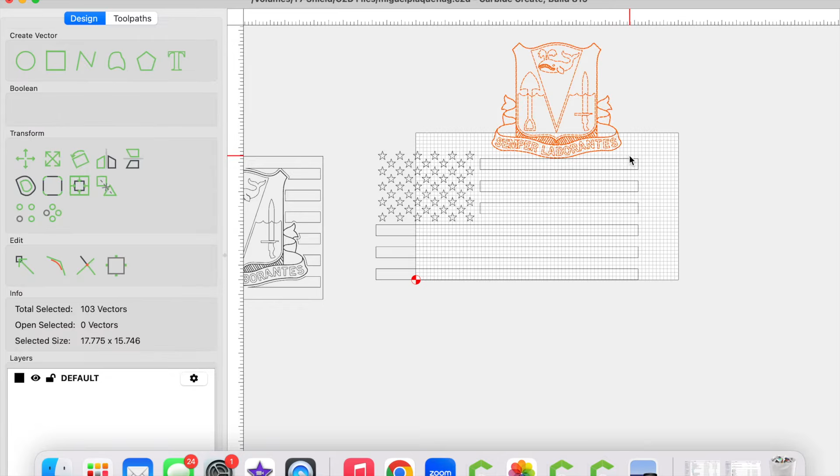For this particular flag, we need to add this logo, and we also need to add a space for a plaque, which is this little rectangle here.

But let's go ahead and talk about our setup screen. The first thing that I need to do is create the grid, which is basically the material that I'm cutting on. It's a 36-inch wide piece of pine, and it is 20 inches tall. That is the material that I'm carving on, and that is from Lowe's.

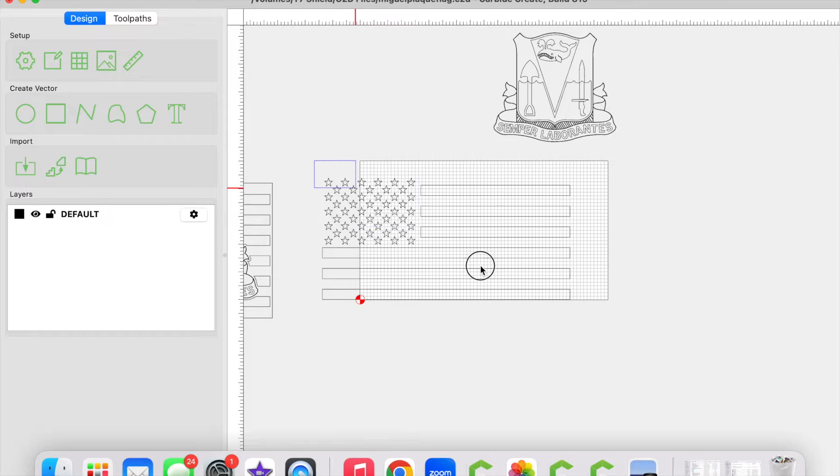That's the edge glued pine panels from Lowe's. My final flag is not going to be that size though. It is going to be 19.5 inches tall. So what I'm going to do is move this flag, and create a rectangular vector. I'm going to make this 36 inches wide, which is the true size of the panel, but 19.5 inches tall.

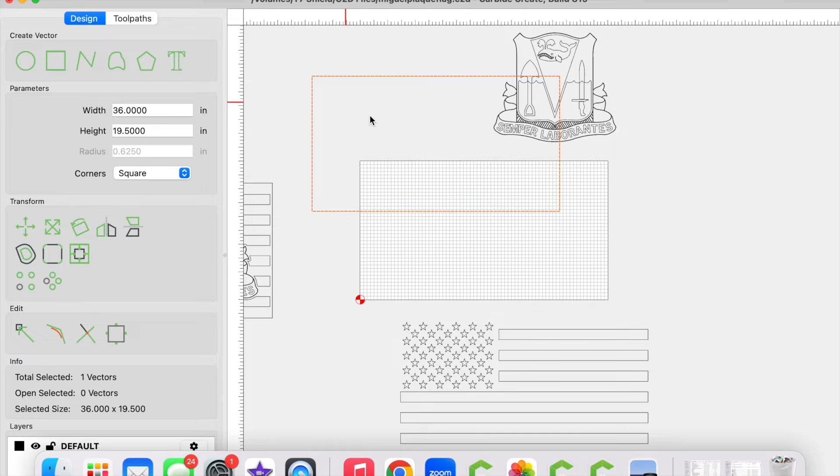And I'm going to have that vector selected. I'm going to come over here to the align vectors option, and I'm going to center it. This is going to give me the correct dimensions of the flag, so everything's going to be sized to the correct dimensions.

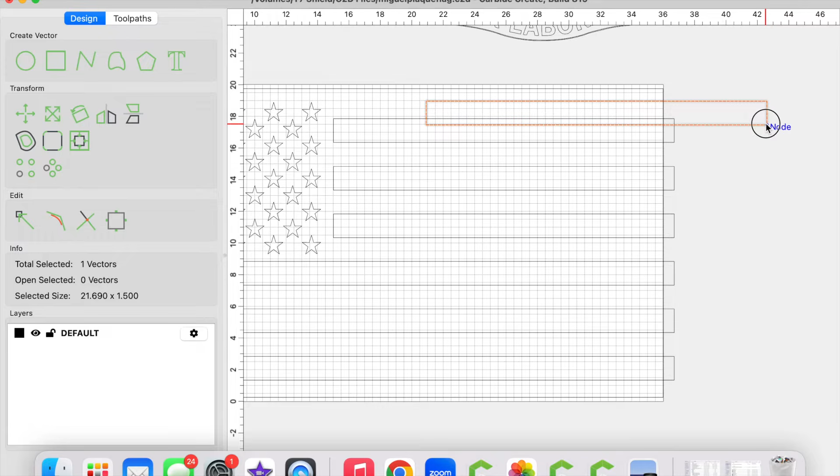So what I need to do now to correctly size this flag is create and copy, actually more than anything, not create, but copy and paste this particular stripe first. So I'm going to press Command C and Command V. If you have a Windows operating system, it's Control C and Control V. And I'm going to attach it to this corner node just to get the stripe attached there.

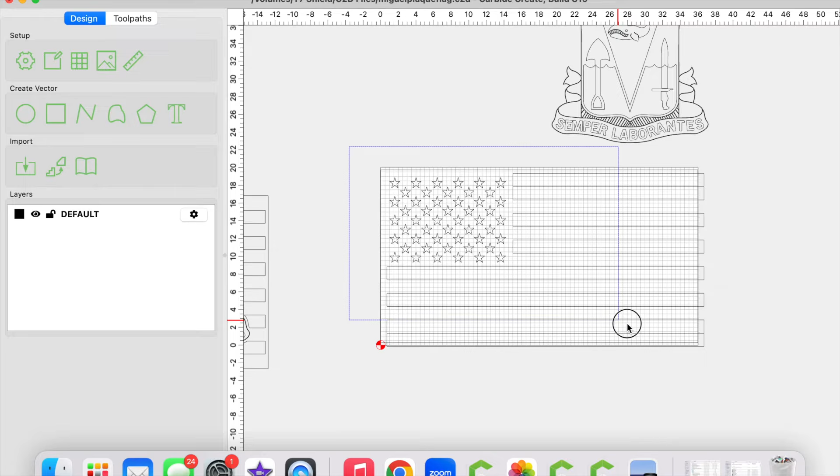And I'm going to do the exact same thing to this bottom 12th stripe, and then paste it here to create my 13th stripe. Once I have those there, I'm going to select the flag. As you can see, I selected the outer vector, so I need to get rid of that by holding Shift and deselecting it.

Now I can group my flag by clicking on this group vectors icon, and then I'm going to press align vectors and align center horizontally and vertically. As you can see, that is a little bit too close for my liking here on this edge for the stars and the stripes as well.

So I'm going to click OK, but I'm going to click on scale, and then click and drag the flag a little bit in to resize it or shrink it. And then once it's reduced in size, I'll do the exact same thing, align vector, center horizontally and vertically. And that to me gives me what I like.

It's a little bit more space here with the stars, and this top stripe is a little bit closer to this edge, so I'm okay with this particular position here. So we're going to click OK, and that is good to go. I'll go ahead and select everything and ungroup it. Now we can get rid of this stripe, number 1 and number 13.

Okay, with my logo now, resize it to whatever you think would look best within your flag. I'm going to center it now to the right hand side of the flag, or basically center it to this stripe, to the union stripes.

So the first thing that I'm going to do is, you can have it way out here, but you're going to have your logo selected, hold shift and select a stripe. Now you have both these selected. We're going to click on align vectors, and click on align centers horizontally. So now the logo is centered to the union stripes.

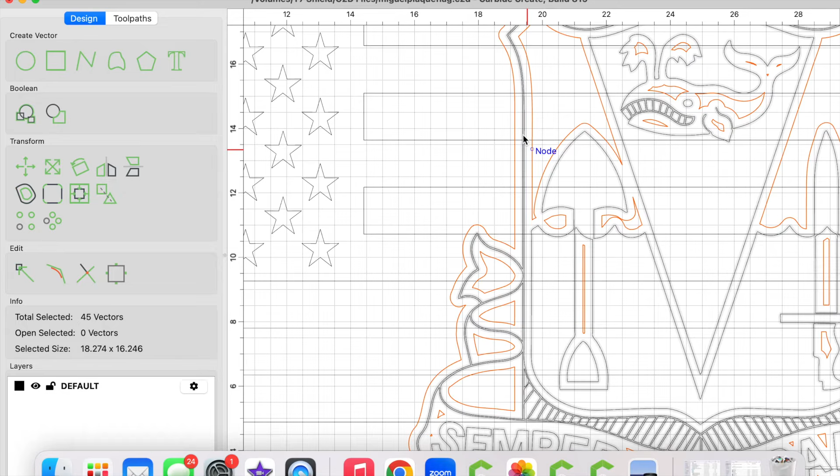If we zoom in here, you can see that the vector we want is this outside vector, the offset. But notice that also all these extra offset vectors were created. We don't want those. So the easiest way to get rid of these without selecting them individually is to hold shift, deselect the one we do want to keep, which is this outermost vector, and press delete.

Now every other offset that was created is deleted. The purpose of this process is to split these stripes so they go around and cut away, right, rather than going through our design as they currently are. With the offset created, we're going to see which stripes intersect that offset. It looks like every single stripe has some sort of intersection with this offset.

So we're going to hold shift and select every single stripe, and then group them. With the stripes grouped, we're going to hold shift and select that outermost vector, and press Boolean subtraction. Once we press Boolean subtraction, these blue vectors are what's going to be your final product.

You can see that the blue vector, or the stripe, comes up all the way to this part, and then doesn't intersect anymore with this logo. So let's go ahead and press OK. And there you go, we have a perfectly created logo, or merged logo with the flag.

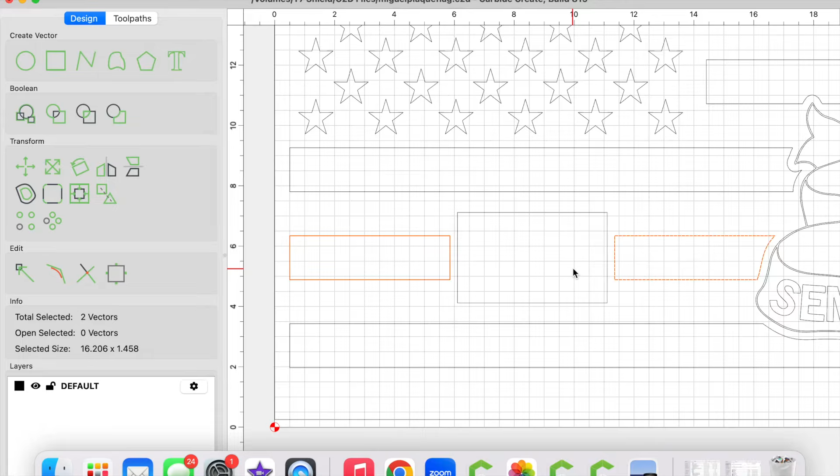I'm then going to click on Boolean subtraction, and that creates that split there. You can see it in the blue already. Press OK, and now we have that stripe split or subtracted to allow for that plaque.

I just want to jump in here now that I've edited this video — I think the best way to center the little plaque rectangle horizontally would have been to use the stars rather than the stripe itself. Had I used the stars, it would have given us a better centered look overall. So just keep that in mind. If you do something like that, I'd recommend centering horizontally based off the location of the stars.

Okay, so the next thing we need to do is work on our tiling. Since this is a flag that exceeds the cutting area of my CNC, I need to divide the carve into 2 steps, or 2 carves, in this particular case.

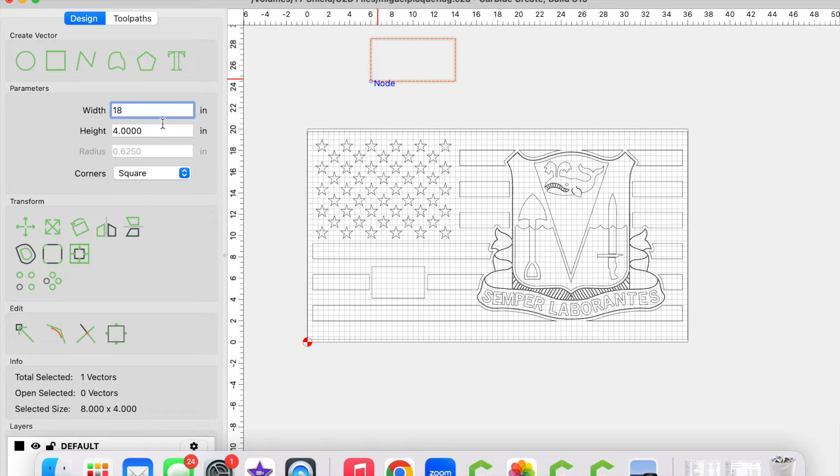Okay, so now we're going to go ahead and create those tiles. A tile is just going to be a rectangle vector, and I'm going to divide it in halves, because my cutting area is 30 by 30, so 30 inches wide. Since this is 36 inches wide, I cannot cut it straight in, so I'm going to create a width right down the middle, which is 18. This is going to remain the same at 19.5.

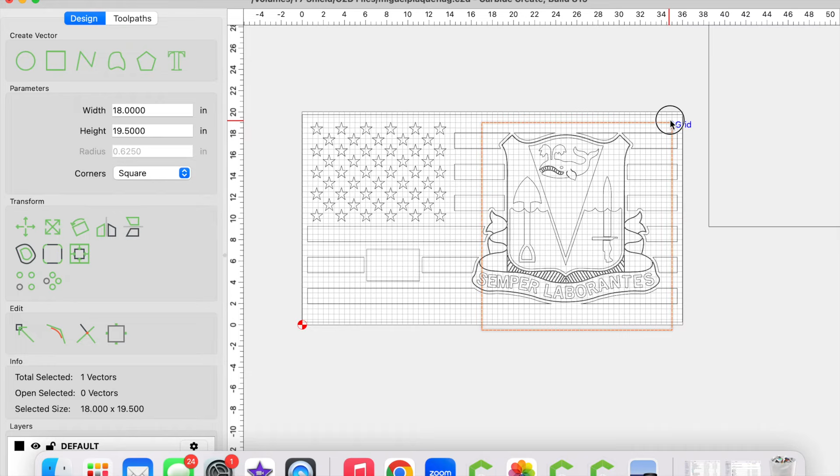I'm going to have that vector selected. I'm going to copy and paste it just like that, and I'm going to have this one here available for later. I always like to start on my right hand side because that's what gets carved first when I lay it on my CNC. So I'm going to put it on the right hand side, bring this vector and attach it to the very corner there, and we're going to move on to the next step.

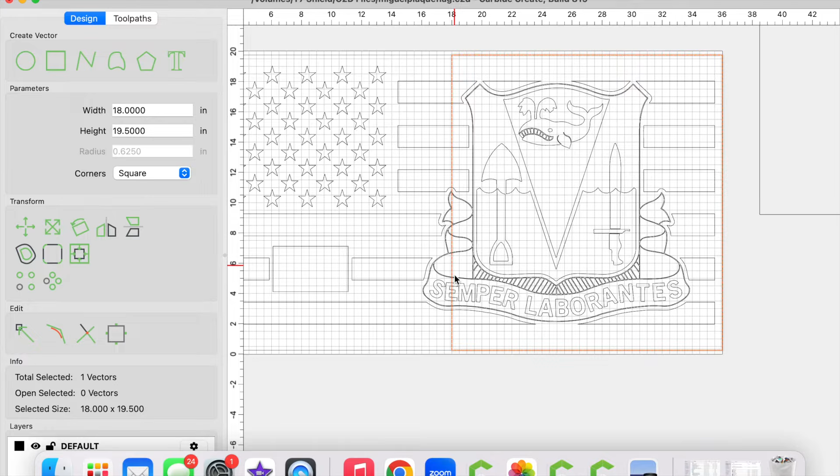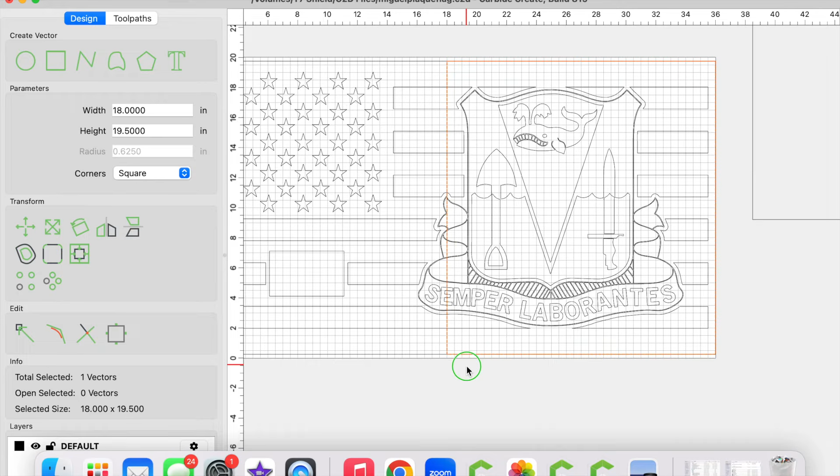Conventional wisdom, or the typical information you're told when it comes to tiling, is that whatever fits within this tile, within this rectangle, is what's going to be carved. If anything is outside or to the left of this tile, it's not going to be carved. So that would mean this ribbon has to somehow be split here with this E, this ribbon, and these stripes. Well, I'm not going to do that. While that may make sense, I don't think that is the best or most efficient way to set up a tiling piece.

What I would recommend you do is to think about your cutting area, what you're allowed to cut, and manipulate your vectors and your tile to better benefit you. Let me explain what I mean.

So again, this is cut here down at the 18-inch width. I have a 30 by 30 cutting area, so I know that I can actually carve something that exceeds this 18-inch line over here to the left. So what I'm going to do is have my vector selected, and I'm going to scale this and increase this size. Just through trial and error, I like to include all the stripes up to all the union stripes if possible. At this point, I'm at 22 inches, so I know for a fact that I can carve all this.

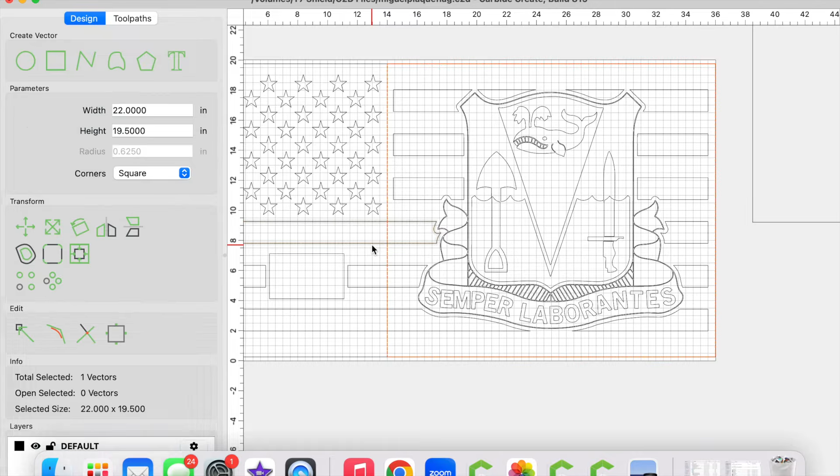So what I'm going to do is press done. I'm going to see what intersects now with this vector here, this line part of the tile, and I can tell that it's these 3 stripes. So I'm going to select these 3 stripes, holding shift and selecting all these stripes, and then I'm going to group them. With them selected, I'm going to hold shift and select the tile, and then this time I'm going to click on the Boolean intersection.

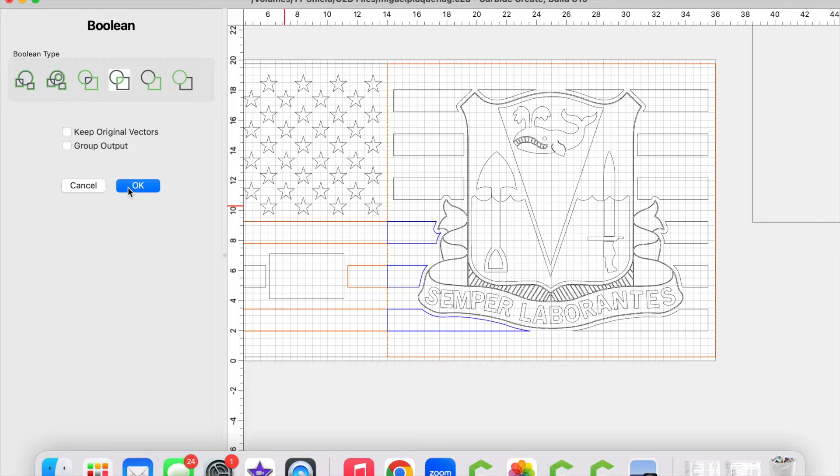And I'm going to press OK. Now I have the stripes here that are to the right of that tile available for me to group over here on the right hand side now.

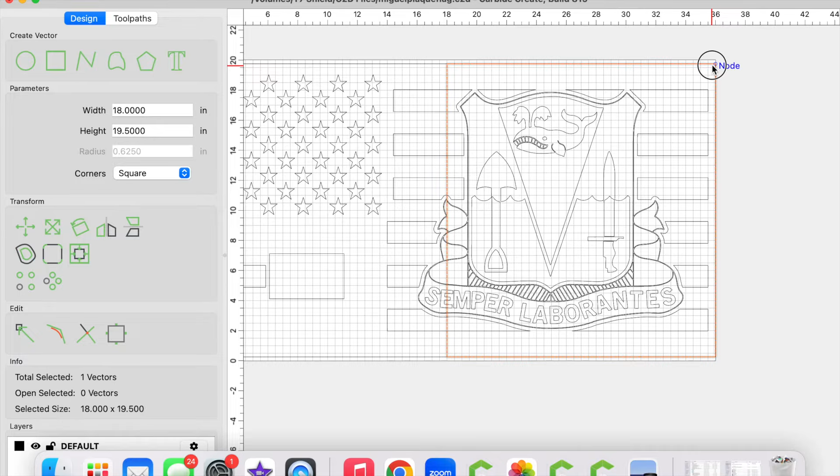So what I'm going to do is bring in this extra vector that I created with the width of 18 inches. I'm going to attach it back to my correctly sized flag vector, and now all this right here is going to be one tile. So I'm going to select everything, group it, and then pull it away, just like that.

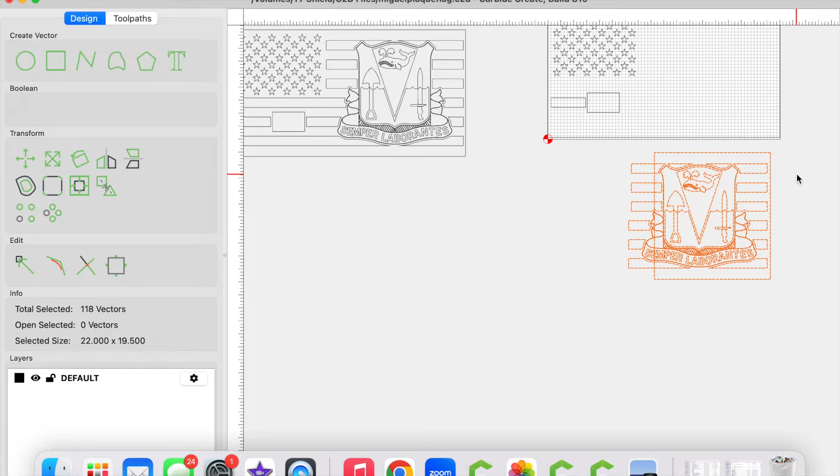And what I failed to do is I failed one major step. I failed to create copies of my flags. Once again, through the magic of editing, I'm going to undo everything that I did and then create a few copies to be able to move on to the next step. So give me one second.

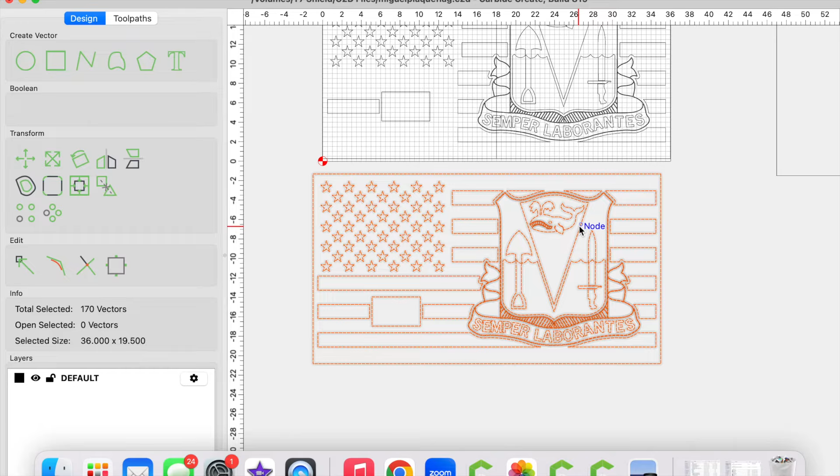Okay, picking back up where we left off, one of the tips that I forgot to mention is that once you have your flag correctly sized, go ahead and make several copies of it, because you're going to at least need one to finish off this tiling process. So here is a copy of it, one of the copies that I have. If you recall, we had created our tile here and have everything grouped. With another copy created, we're going to bring it up and attach it to the correctly sized flag, just like that.

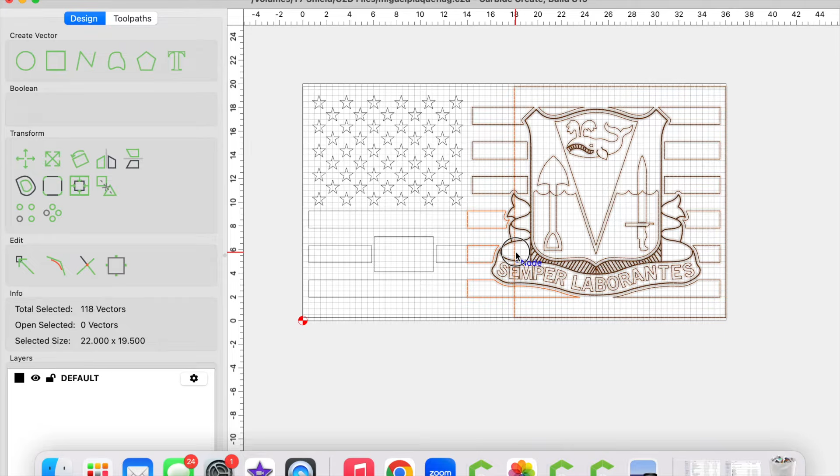I'm then going to select this tile here. You can see that this vector right here is not selected, and that's because that is my tile. So I'm going to go ahead and click on that one and bring it out, just like that.

Now I have this tile ready to go, and I can work on carving this left hand side. So I need to create another vector at 18 by 19 and a half, and attach it to the left hand side. Okay, so now my tile is placed on the left hand side, and I got to look at this image, just as we did before, and see what intersects this particular line of this tile.

It's going to be these union stripes, this ribbon, and then this bottom number 12 stripe. But if you recall, we're going to carve the union stripes on the first tile, as well as this logo or ribbon. So the only one that I really need to intersect is this bottom one. That's what we're going to select.

First, we're going to select the stripe, hold shift, select our tile, and then press Boolean intersection, press OK, and there you go. There we have it.

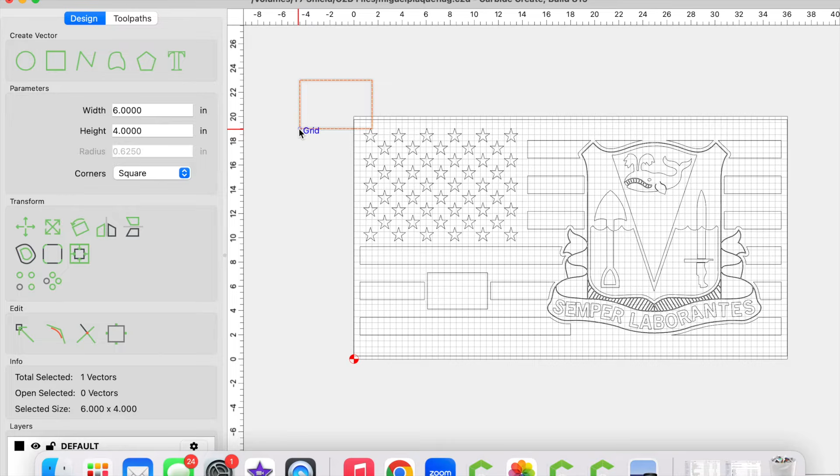That's already set up. What I didn't do this time around, just to show you, is I didn't have an extra copy of the tile created. So you just got to create the vector again. This is 18 by 19 and a half, just like that. We're going to set it up here on the left hand side corner. Just confirm it. There we go.

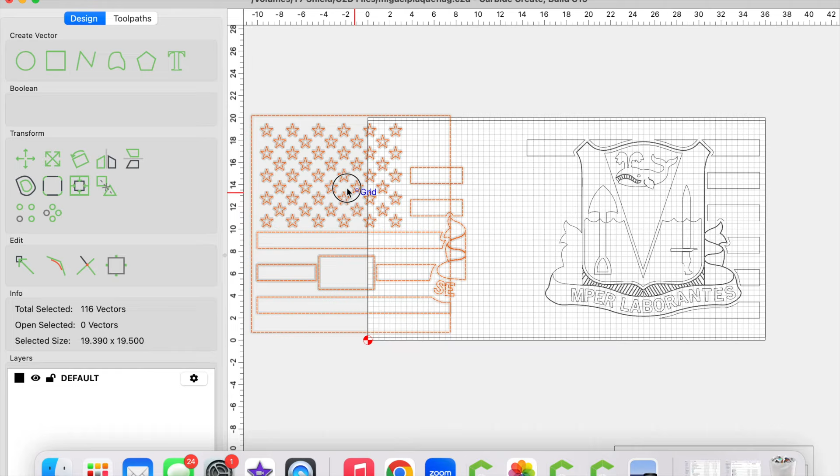Then when we go to select everything here for this tile, we're going to just select it like that. I know I got some of that ribbon. That's okay, I'm going to delete that here in a second.

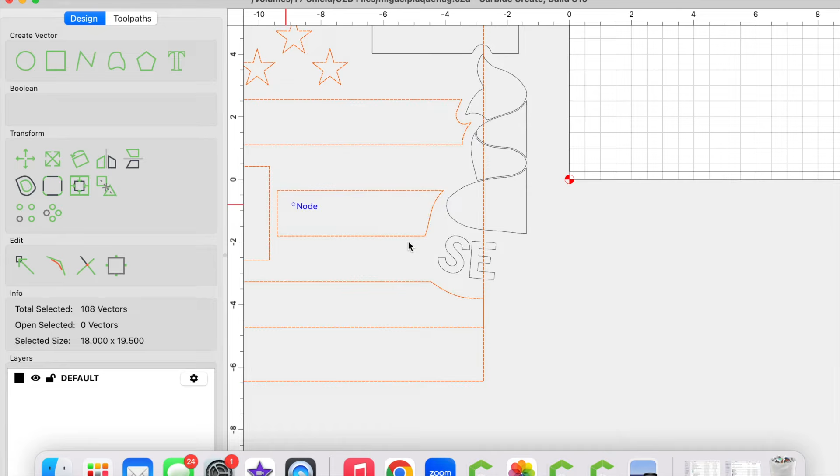Okay, so now with it selected, I'm going to ungroup everything, hold shift and deselect all these vectors that I don't need, and group it again, because those are the ones I do need. We can pull this off like that, and we can get rid of this one now. Don't need this one anymore.

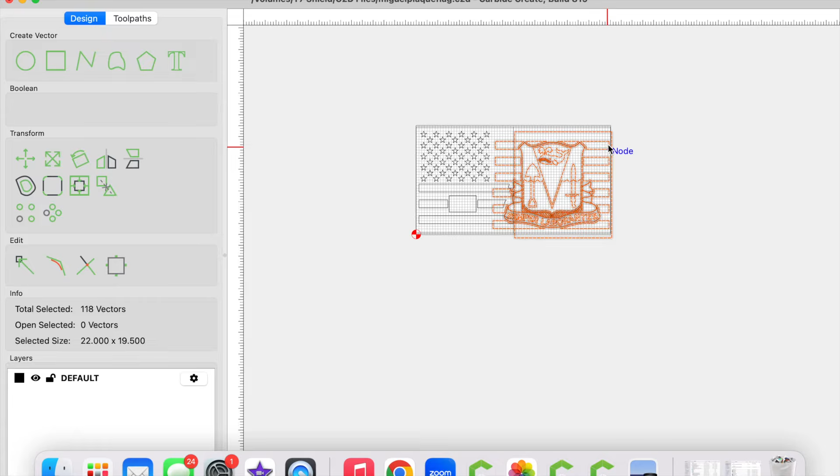Okay, now with our tiles created, we can confirm that the tiles are done correctly, because we can attach everything back to the grid using our nodes. And if it creates the image correctly, we know that we did it right. And there we go, we are correct.

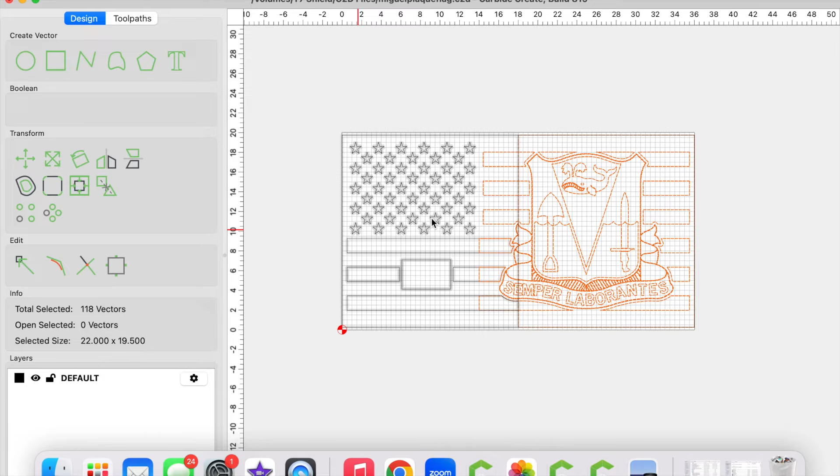Everything's turning out right. So now we're going to move on to the next step, which is the setting of the toolpaths and execution. Because my CNC is 30 by 30, it cannot cut a flag that is 36 inches wide. So the only way to make this work is to set it up vertically.

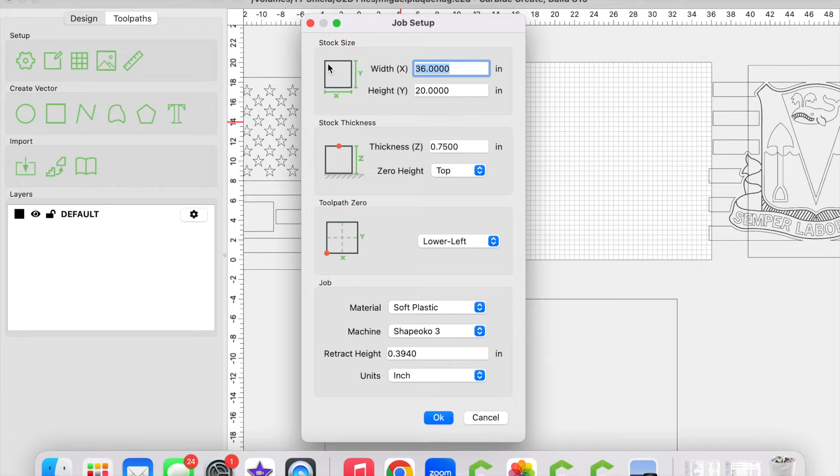I'm going to pull these off for a second, and get rid of this here for a second. Now I need to set this grid up in the vertical direction, so I need to click on my setup screen again. I'm going to switch these out, so now the width is 20 and the height is 36.

I'm going to do the exact same thing for this representation of my final flag, so it's 19.5 by 36. I'm going to select align center horizontally and vertically, and that's set up correctly now.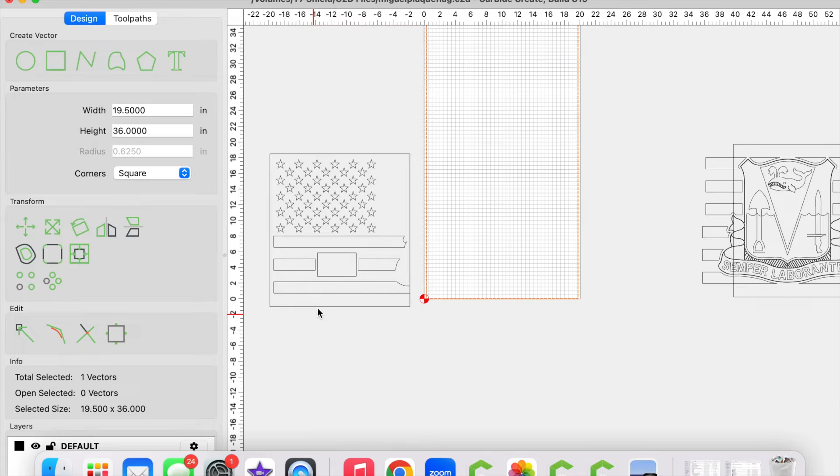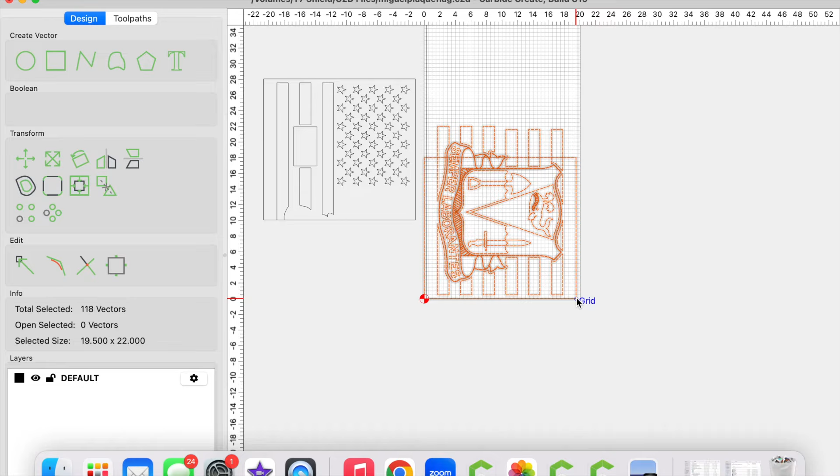I'm then going to select my tiles and rotate them 270 degrees. So type in 270 and then press done. Same with this one, 270, done. Now we can go ahead and place them on the grid again.

I'll actually leave it like that for now, because when we actually go to execute it, we're going to start with this right hand side tile first. So I don't need this one right now, and it's not even going to be placed up there anyways.

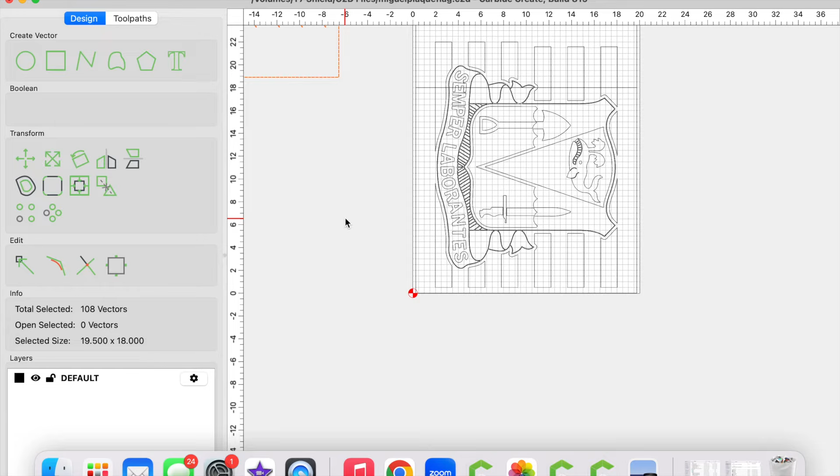So if you can visualize this, when we set up our material on our wasteboard, this line of the grid, or just this edge, is going to be edged up to the very edge of our wasteboard, and that's where we're going to secure it. So that is edged up here to the wasteboard. With it edged up, we're going to run our toolpaths on this first tile.

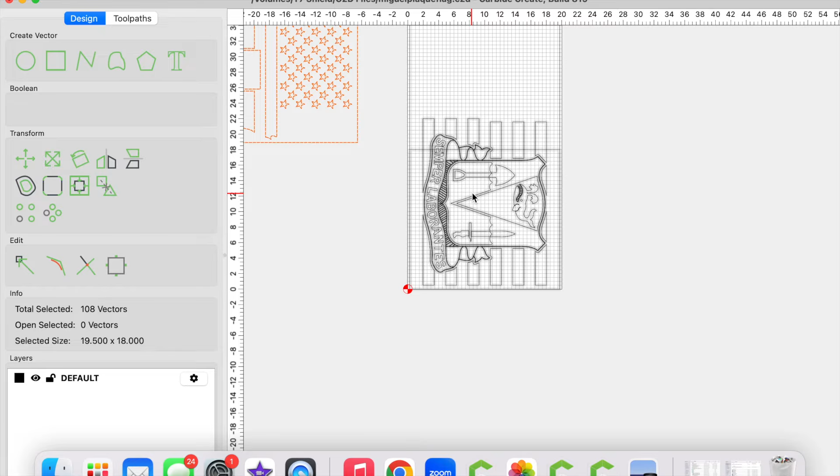You're going to run it however many times you need to, because sometimes there's shallow carves to get alignment placements, things like that. But once you are done with your carve and you're ready to take it off the CNC, we got to think this through now.

You're going to move your flag material down to the 18-inch mark line on that piece of material. You're going to shift that down until you get to the edge of the wasteboard again. So the edge of the wasteboard here will be the start of that 18-inch mark on the material. And if you're thinking through this, the first 18 inches is going to be hanging off the CNC machine in the air. You got to make sure that's secured down correctly.

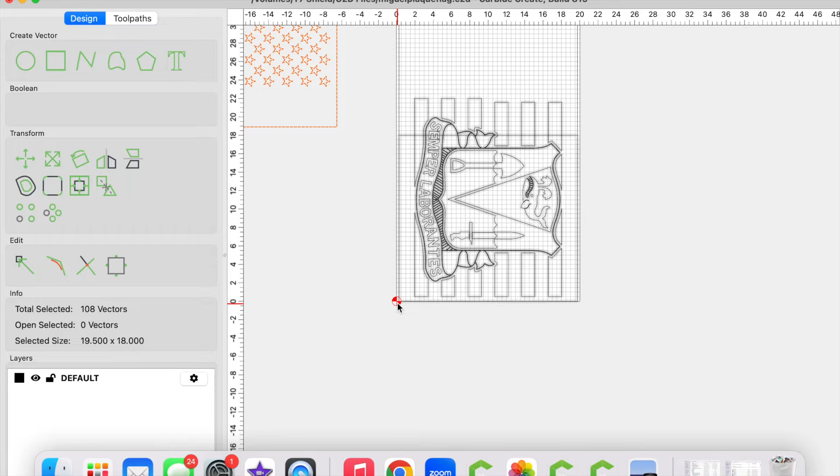Once you have that secured, you're going to remove this here, and you're going to bring in that second tile. You're going to set it up here, and you're going to then execute or send off those toolpaths for the CNC to run.

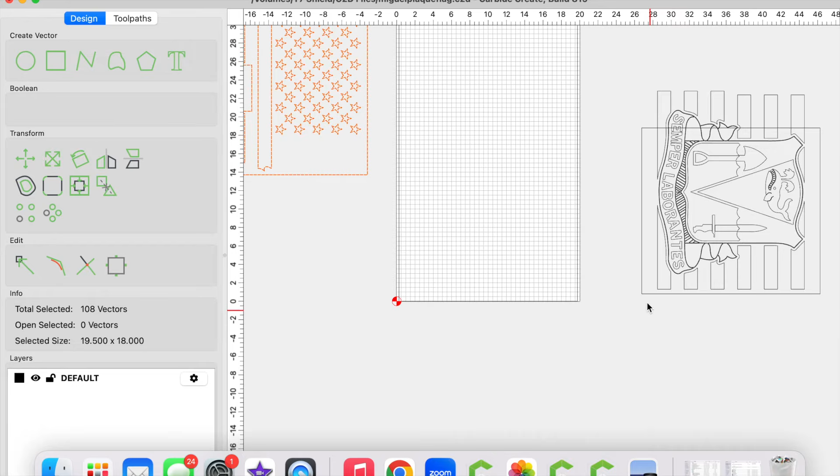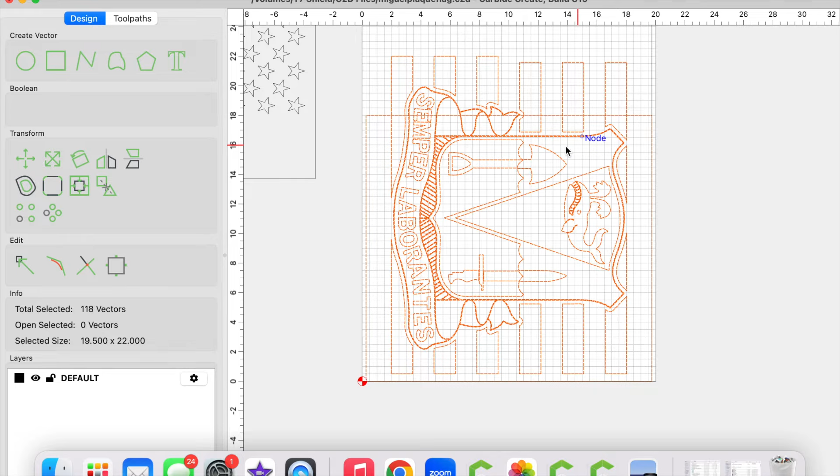Let's talk about toolpaths real quick. For this particular project, since I did do some painting, I did a shallow carve first at 0.02 max depth. I set my Z0 somewhere over here in the badge area the first time, but I noticed that the stripes were not carving correctly, and some of this shield did not carve correctly, so I ended up carving it twice. I set my Z0 over here somewhere the second time around to make sure I had good clear lines, that way I can paint this thing correctly.

Since my favorite thing to say when we carve flags is that this is not fine furniture, I like to push the speeds a little bit. So when we come to set up the toolpaths, we want to make sure to ungroup the group here and get rid of this tile. We don't want that in our toolpath selection because then that'll mess everything up.

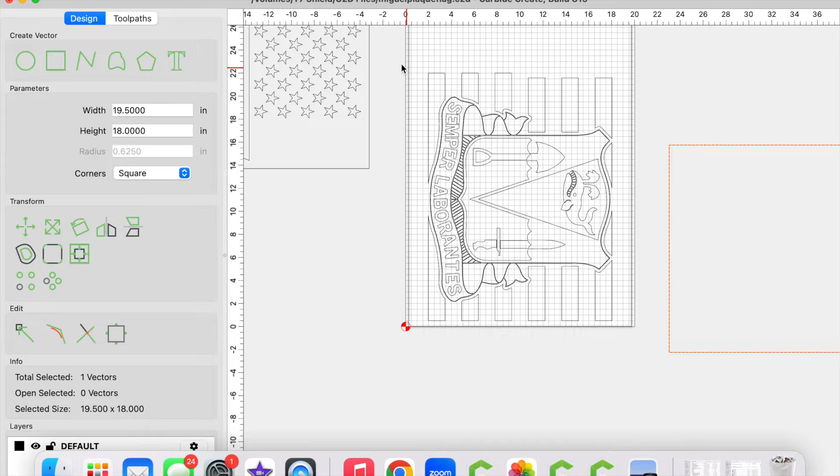With our stripes and logo selected in this case, all I did was an advanced VCarve. To create that, you select your stripes and your logo, click on this VCarve icon, use current selection, enable the pocket tool. I used a 201 1/4 inch end mill, plunge rate and feed rate 80, 90, RPM at 18,000. Then I did use a 60-degree V-bit to come in and clean up the edges and get all the finer details, 80, 90, 18,000 as well.

Again, the first carve was at 0.02. Once I had that all completed the first time around, I actually deleted it and just set it to a deeper max depth. So I did again, 201 end mill, 80, 90, 60-degree V-bit, 80, 90, and then I think I did like 0.04, 0.05 - I can't remember at this time. It was back in July that I did this carve.

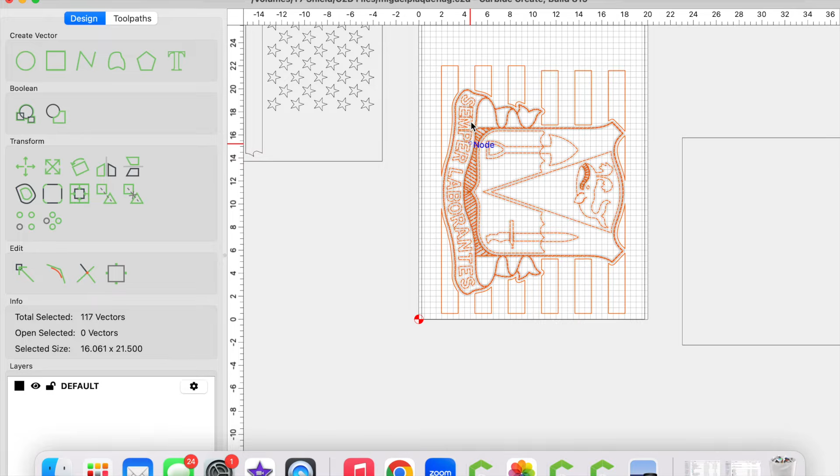Okay, so now with that executed, we can then move this off to the side. We've shifted down our material, we secured our material. Now we bring in this second tile, and we are going to run it as well. We're going to repeat that process. We're going to select our tile.

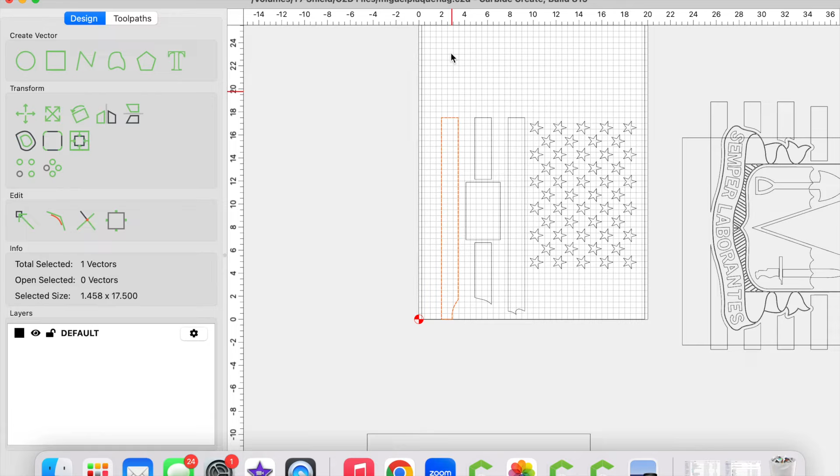We're going to ungroup it, and we're going to get rid of the tile now. Then we're going to select our stripes and our plaque. That was an advanced VCarve as well. So click the VCarve icon, use current selection, enable the pocket tool, 201 end mill, 80, 90, 18,000 RPM. The V-bit was a 60-degree V-bit, 80, 90, 18,000.

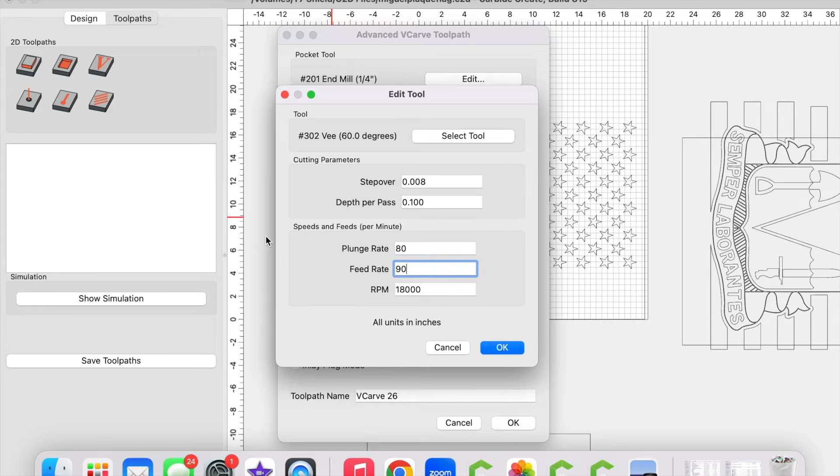Here's another tip, tip number 3 maybe at this point. When you go to carve your second tile, you need to reset your Z0. And when I reset my Z0, because I'm not perfect, right, there is going to be variation between the Z0 of the first tile and of the second tile.

So what I like to do is set my max depth back to 0.02. So if I carved a max depth of 0.05 on the first tile, I will still, regardless, set a max depth of 0.02, because I want to, if I can, work my way up to that max depth that is even or matches that first tile.

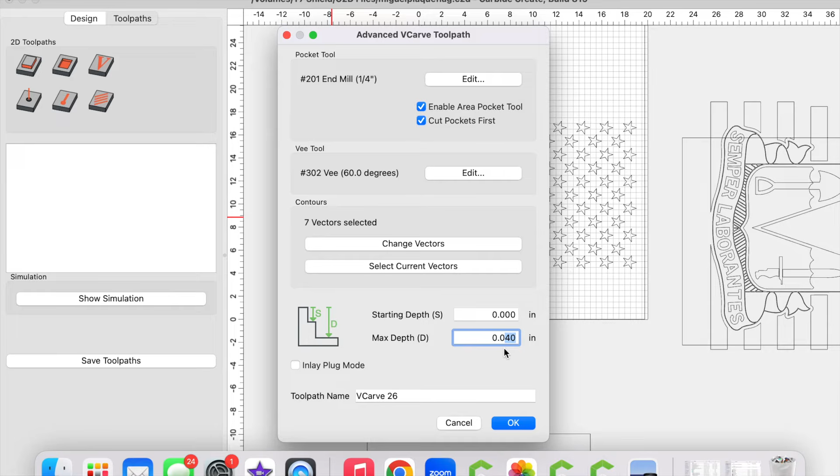Make sure to set a shallower depth just to check how you're looking. It doesn't have to be on the entire design, it could be on one stripe, to make sure if you're at 0.02 and carving shallow, you can increase it to 0.03 and work your way up to match that depth. I'm going to leave it at 0.04 here, since you can do a test carve on a single stripe or an inconspicuous area to get that final max depth. So keep that in mind.

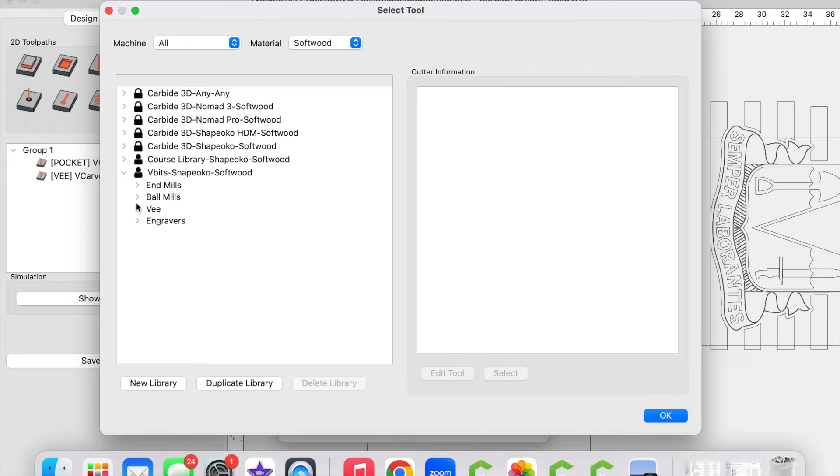The stars are going to use a V-bit or VCarve toolpath. With our window opened up, we're not going to enable the area pocket tool, we do not want that. We're going to edit only the V tool. I'm going to use a 90-degree V-bit, which is best in my opinion for this size of flag, and we'll go 80-90 as well. The depth per pass is updated to 0.15, and the max depth here is the thickness of your material, so 0.75 in this particular case.

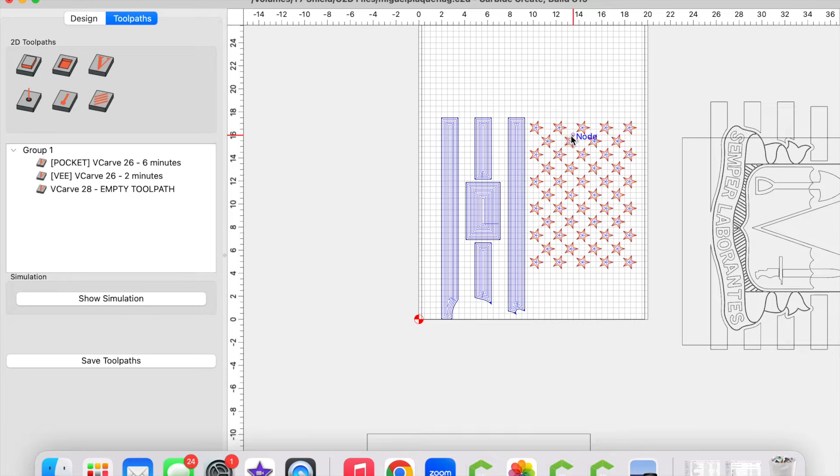And there we go, we have our stripes ready to go, and that's going to take about 8 minutes. Not too bad. So that's how you would set up the second tile.

I would start with stripes first to make sure my Z0 is good on these stripes, and then once you're ready to carve the stars, I would reset my Z0 again just to make sure we're getting good star output.

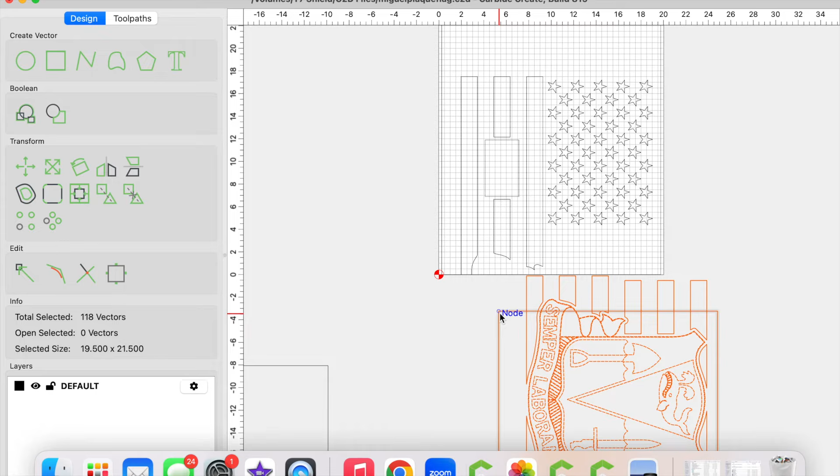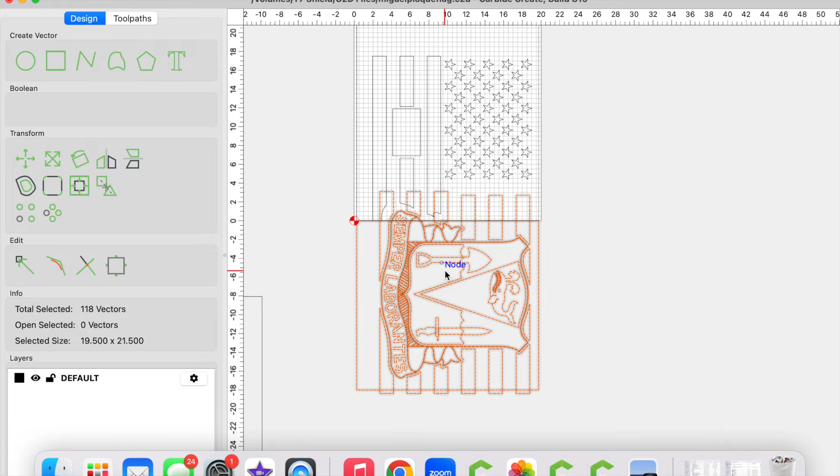One more thing I want to mention, maybe I should have mentioned this while doing it, is when you set up your second tile, you want to make sure you bring in your first tile to check that the alignment is correct. As you can see, when I attach this piece to the flag, the stripes are not in alignment. So make sure to bring in your first tile just to check that everything is correct.

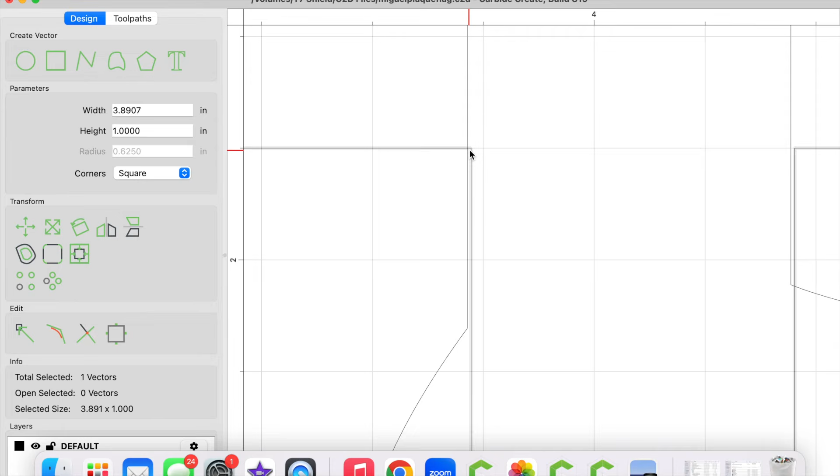The other tip I want to share is that you're going to want to do a test carve to make sure your alignment is correct, so the stripes are seamless as close as possible. What you don't want is to be off, maybe something like this - that actually may be fine, you probably won't see that with the naked eye. But if it was too far off, like something like that, that's going to look terrible.

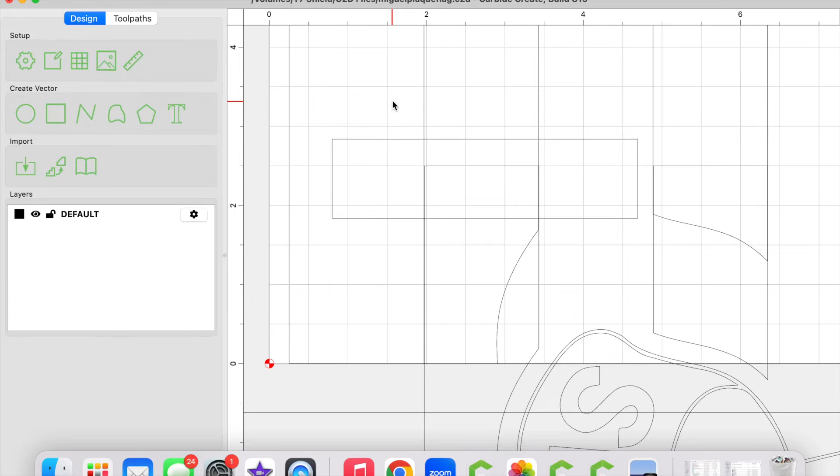So how would I determine correct alignment? I would take a vector such as this, one I just created, and then overlap the joints, or where one stripe meets the other. You select your vector, this rectangle vector, hold shift and select the stripes, click on Boolean subtraction, press OK. Before we press OK, what we're left with is these vectors here.

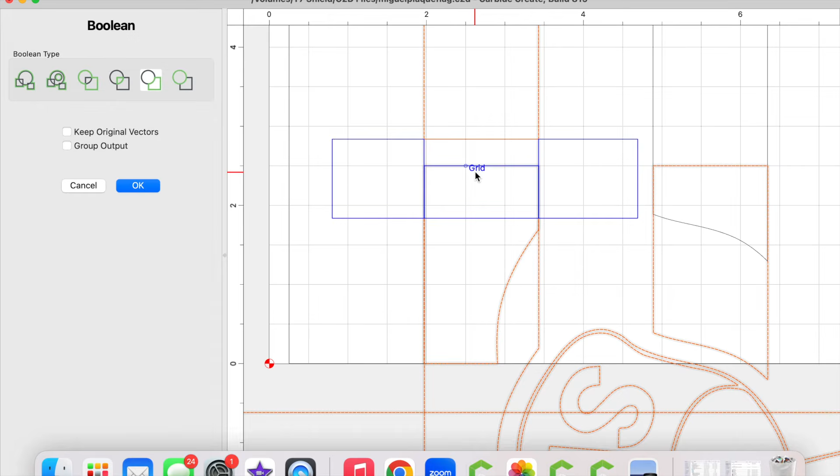I want to carve this one right here, in the middle, because this will let me know whether or not my new placement, my new X specifically, is in the correct location. So with that there, I'm going to carve this one at a shallow depth of like 0.01, and if I'm off, I'll adjust my X zeros. Typically I'm off to the right, so I'd move it to the left - I know that based on my CNC history, my use of it, but you may find something else on yours, you may actually be dead on. Either way, I'd do some sort of test carve in an inconspicuous area if possible.

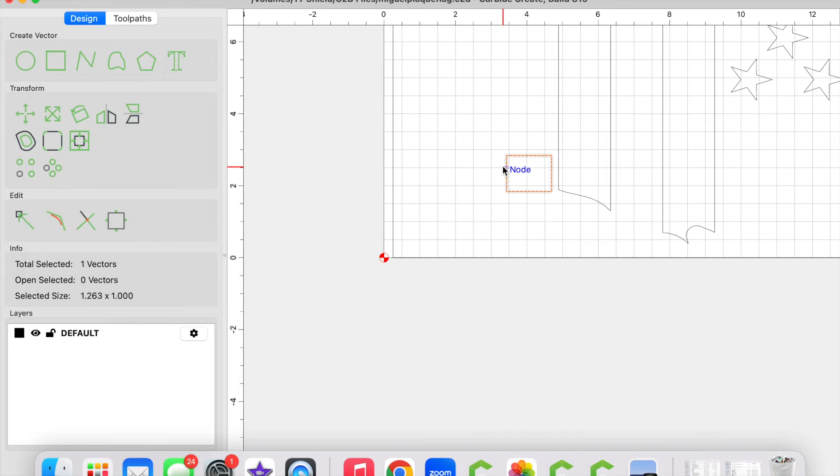All right guys, so that's going to be the process of how you set up a custom flag, how you set up the tiles. You have some tips here that you can consider when you are executing it. So let's go ahead and take a look at the montage video of this actually being carved.

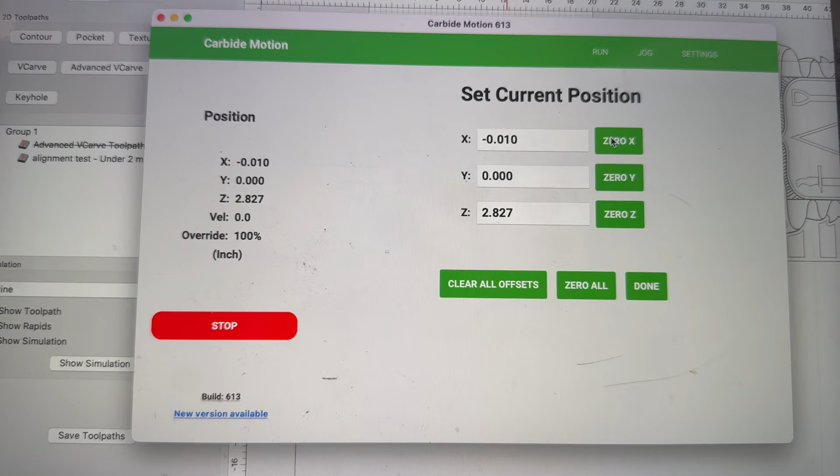Just like that, I moved it 0.01. I'm going to set my X0, excuse me, X0 - don't change anything, just your X0. Done. Okay, and then I'm going to run it now.

Okay, so my quarter inch end mill just got measured with the bit setter. It's ready to go for take number two. Now that it's done the first time around, and it's not carving way over here in the logo or anywhere, and I am correctly set up, now I feel more comfortable just sending it.

But here we are, just a reminder, it did carve to the left here, or to the right here. I moved it to the left 0.01 inches, set my X0 again. Now let's run it. Let's see how much it takes off, hopefully nothing.

Okay, so that actually looks really, really good. It did not carve up to this line here. It did not carve up to this line. I don't want it to carve up to this line, because my 60-degree V-bit is what's going to carve up to this line. So it did look like it was to the left of the final edge.

So I'm going to go ahead and change it over to my 60-degree V-bit, and I'm hoping that it rides along this line here. Let's hope that's the case, and if so, I know that I'm in perfect alignment.